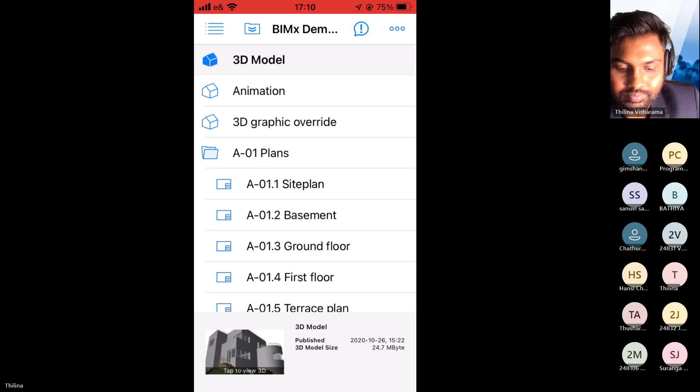I will search BIMx. Can you see my screen? Yes, I think you can. Okay, now I will click on this 3D model. Now you can see a 3D model on your screen. Then I will click on this icon. Now I can go into this building.

So if you guys are into mobile gaming, you know this. But this is entirely different from a mobile game. So this is an actual house. I think you might have heard about augmented reality. This is a sort of augmented reality. You can see a nice little piano, some pictures.

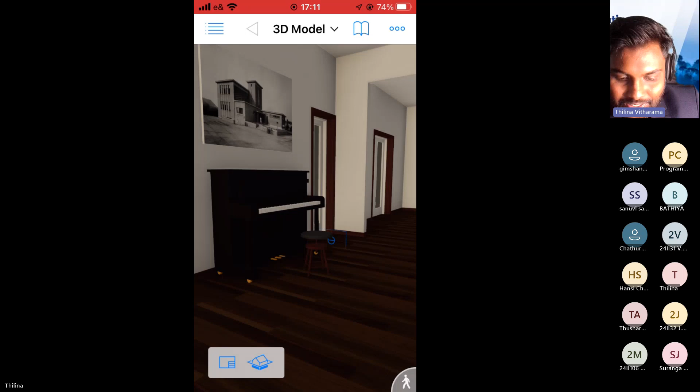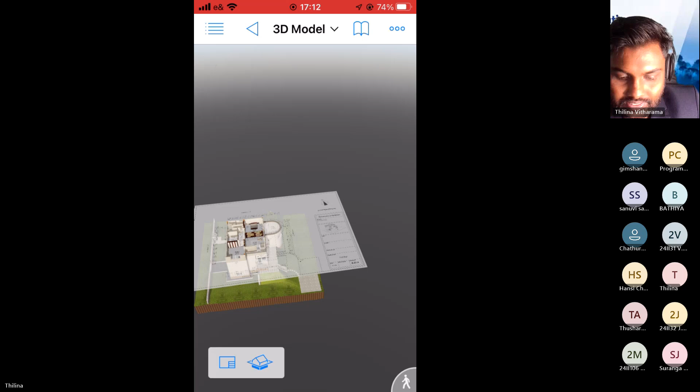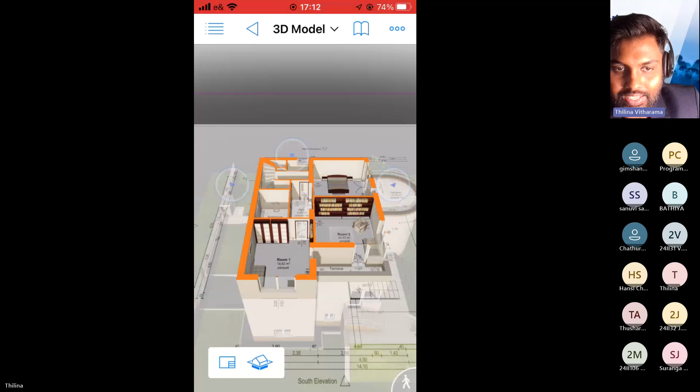I will move inside. I can go up from this staircase. Okay, this is the second level. So you can see the inside. Okay, so this is a 3D model. And if I click on this icon, I can see the 2D drawing. Okay, so this is a drawing. After starting your program, you can learn how to read a drawing. It is very simple, so you guys will have an experienced lecturer panel.

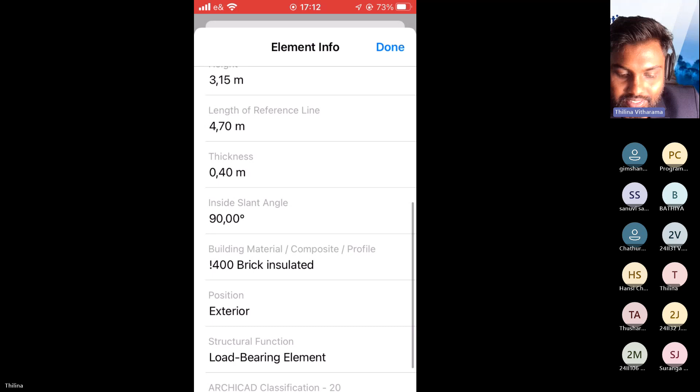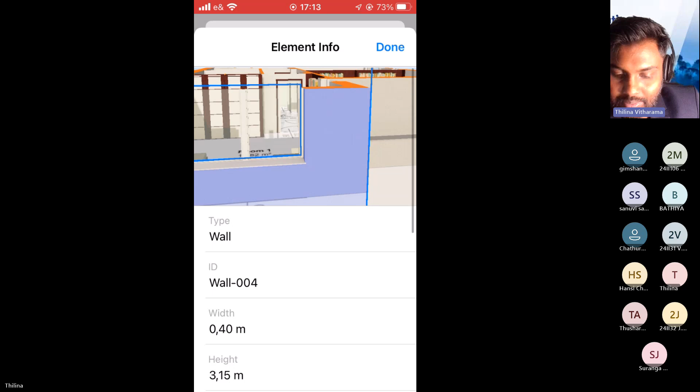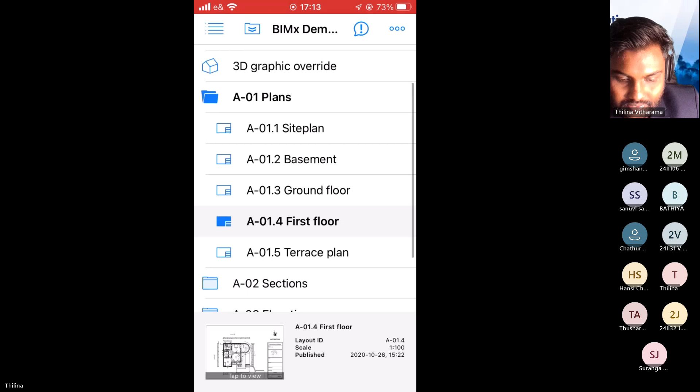I will explain a little bit about building information modeling. Building information modeling is a 3D model with information. If I click on this wall and click here, I can get all the information with regards to this wall. You can see wall type, wall ID, width, height, length, thickness, building material, position, load bearing, structural function, and classification. So you can see all the information about this particular wall. And not only the plan view, you can see side views as well. Sections—if I go to sections, I can see all the side views.

Okay, I'm observing all these things by using my mobile phone. Now I think you guys are eager to learn further on this. So we can spend these 1.5 hours as quality time. You will learn a lot of things with regards to quantity surveying and digitalization. You will love to become a quantity surveyor. I will share my screen and show you my presentation.

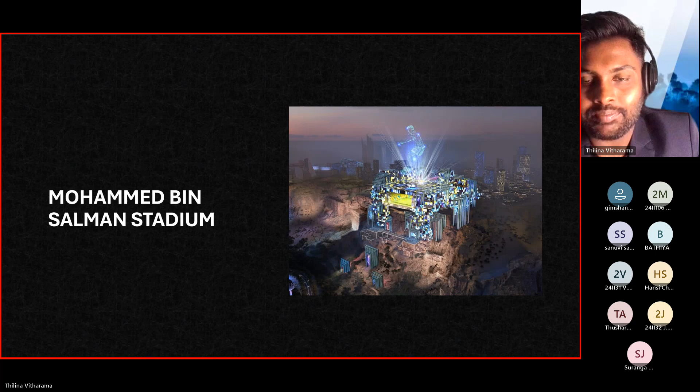Now we have to go to the future. After you become a quantity surveyor, you will work in these kind of projects. This is the Red Sea project in Saudi Arabia, the NEOM project, the Qiddiya project, and the amazing Mohammed bin Salman Stadium. After becoming a quantity surveyor, you can work in these building projects.

Okay, now you guys will be excited to become a quantity surveyor.

Before we talk about quantity surveying, let's have an idea about digital technologies, because today's topic is modern quantity surveying. I will explain about the digital technologies related to the quantity surveying profession. First, I will explain a little bit about digitalization, not from boring theories - I will explain with practical examples. Then these things will go into your blood.

I think everyone knows digital banking. If you have a Visa card, you can pay money very easily, and transfer money via your mobile phone. This is a practical application of digitalization. And socializing - we all know Facebook, Instagram, WhatsApp, Snapchat. We have a lot of digital software for socializing; socialization is already digitalized. Then the transportation industry - if you go to China or Japan, they have a lot of apps to manage transportation. Transportation industry is also fully digitalized now.

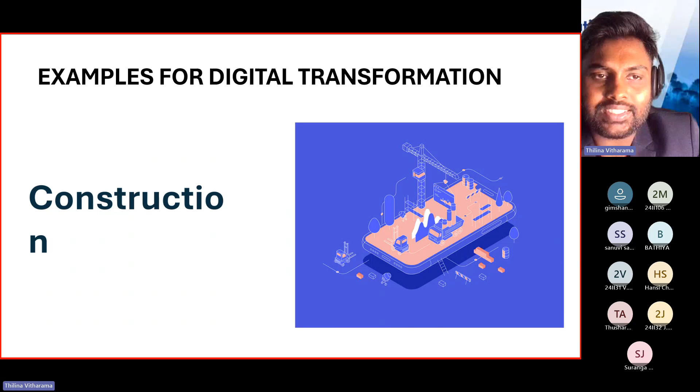Then the construction industry, our industry - what are the digital technologies available here? We have to find that out. But before that, we have to understand what is a digital building. We have a physical building and a digital building, and understanding the digital building is very important.

We design buildings in a physical scenario. Some architects get together with structural engineers and MEP engineers, and they can design a building physically. Then they can start pre-construction - they have to find a suitable person to construct that building. After that we can start construction, and after construction we can do the maintenance. So this is the physical building cycle - very simple to understand, right?

Then what is a digital building? We can create a digital replica of that physical building and manage all the things digitally. Collaborative design - we can get together on a digital platform, share our design ideas, and create a 3D model digitally. Then we can do virtual pre-construction, and e-tendering is the best example.

Then we can do virtual construction - we can simulate that 3D model and do virtual construction. After that, we can do virtual maintenance. So this digital virtual building helps the physical building process by providing information. This is a simple demonstration about physical building and digital building. I think you can understand a little bit about this.

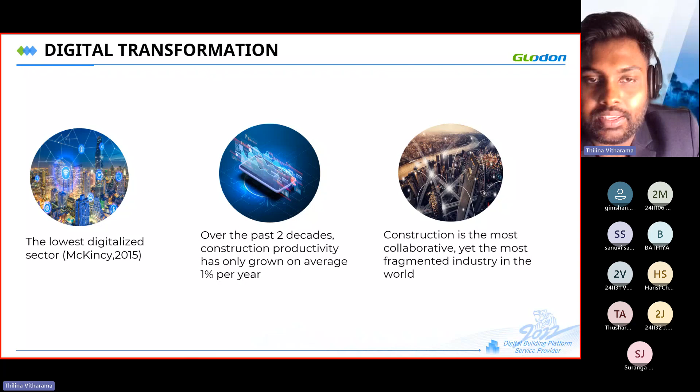Over the past 2 decades, construction productivity has grown on average only 1% per year. If we involve ourselves more in digital construction, we can help improve the productivity of the construction industry. Construction is the most collaborative yet the most fragmented industry in the world, so we have to give our contribution more and more. I hope you guys can understand these things.

Now we will look at some examples of digital technologies used in the construction industry.

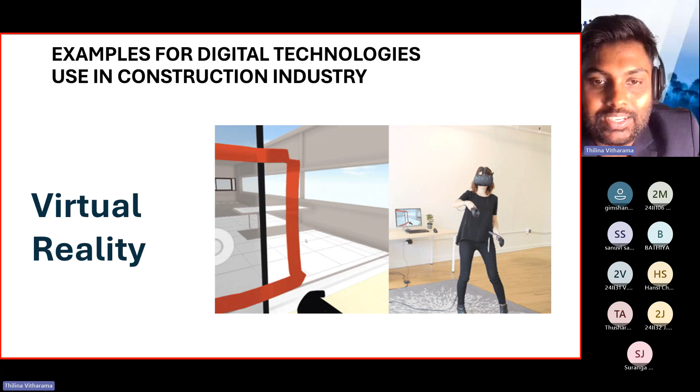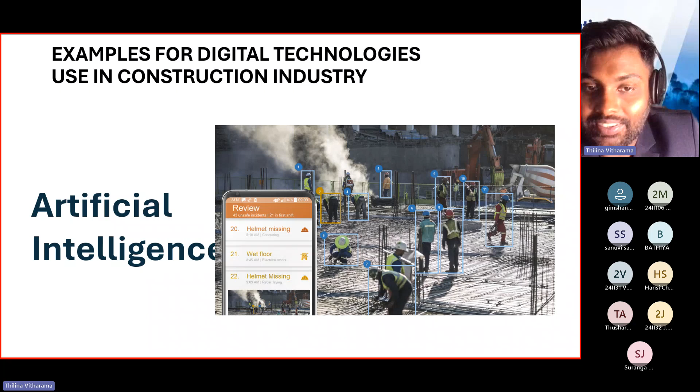Then after that, artificial intelligence. Artificial intelligence is a modern technology. We can use this artificial intelligence efficiently and effectively for construction management. For example, if you see this picture, you can see some wordings: helmet missing, wet floor, helmet missing. I will explain the practical application of this. You can run a drone on top of this construction site and take some pictures, then process those pictures through artificial intelligence. That software will identify who has helmets, who doesn't, and the wet floor areas. Amazing.

And smart wearables. Nowadays a lot of construction professionals wear these smart wearables. For example, if you wear a smart hat, that hat can monitor fatigue, prevent micro sleep, detect collisions. This is very important for health and safety management.

Then 3D printing. Recently I saw a video on LinkedIn. Now Dubai is going to do some 3D printed buildings. This technology is already used in USA and China. This is amazing technology. You can construct buildings within 1 week by using this 3D printing.

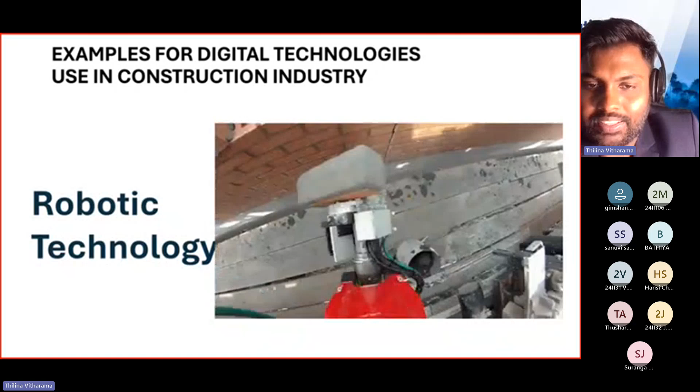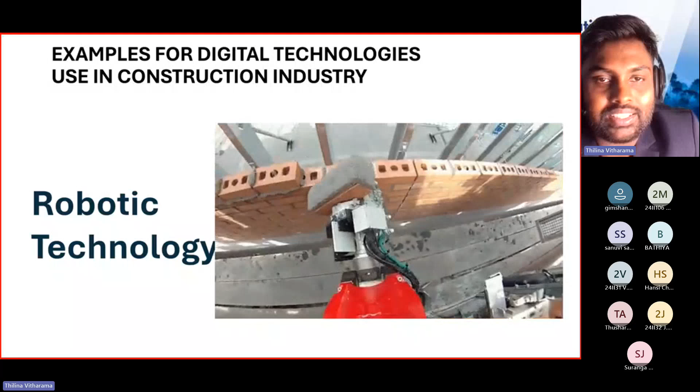Then robotic technology. There are plenty of robotic technologies in the construction industry. We have bricklaying robots, we have tile laying robots. This is another modern technology used in the construction industry.

And drone technology. This is amazing technology. In Sri Lanka, we mostly use drones for wedding photography, right? Wedding photography and traveling. But we can use these drones for the construction industry. We can monitor construction progress by using drones. But in Sri Lanka, we use them mostly for wedding photography.

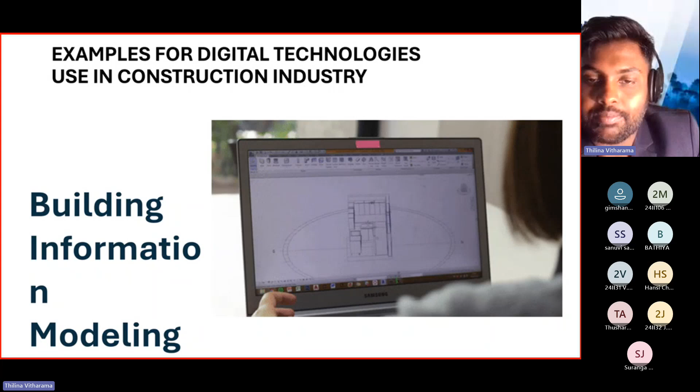Okay, so the last technology, building information modeling. I'm into building information modeling. We can create a 3D model by using software like ArchiCAD and Revit, and we can manage all the information of that 3D model. After getting that information, we can use it for construction management. This is very interesting.

Now we can come to our main topic: quantity takeoff. As a young quantity surveyor, you have to start your career and your learning from this quantity takeoff part. First I will explain to you about this manual takeoff.

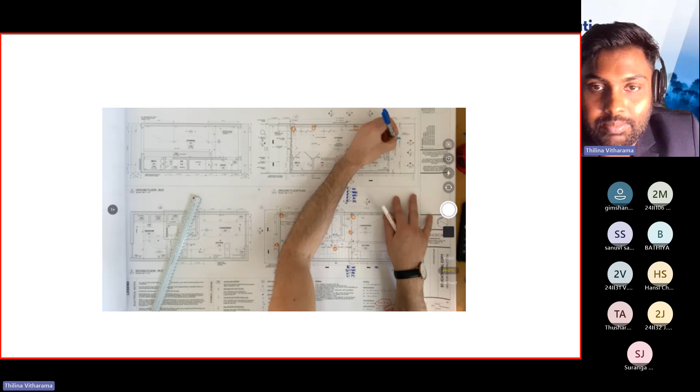20 to 30 years back, all quantity surveyors took off quantities by using this manual takeoff method. We had large scale drawings, so we used manual scales and extracted all the quantities, then did our estimations. Then after that, 2D takeoff came.

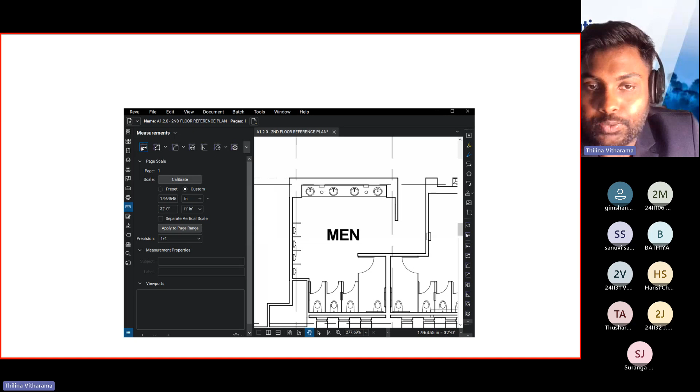We had a lot of software. First we adapted to AutoCAD plus Excel. We extract all the quantities by using AutoCAD, then put all the numbers in Excel and manage our cost by using that method. After that, software like Bluebeam and PlanSwift came, and we used those to measure quantities.

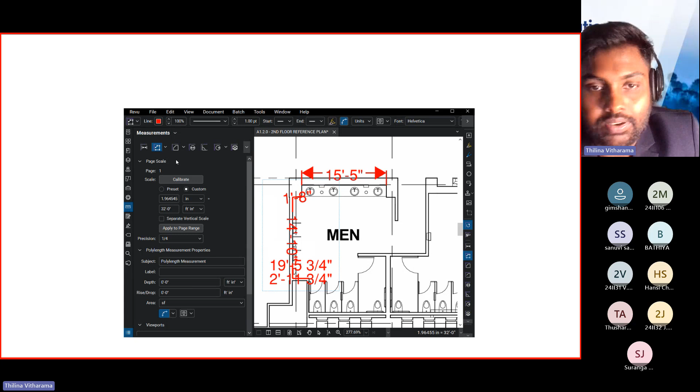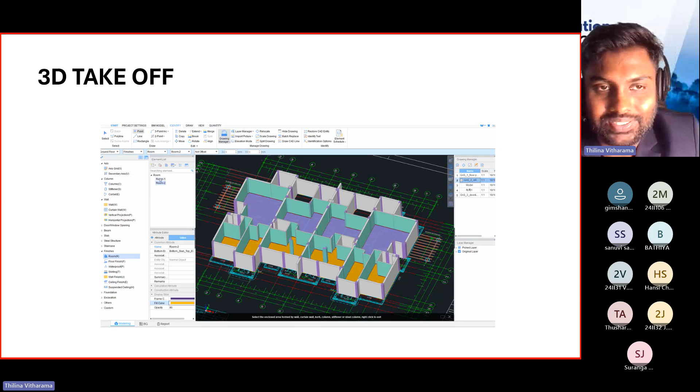Then after that, CostX came, and we used CostX for our measurements. Now this is the 3D takeoff era, the BIM era. Nowadays quantity surveyors are receiving 3D models instead of 2D drawings, and we have to use these 3D models for quantity takeoff. I think now you have got a very good understanding about this quantification.

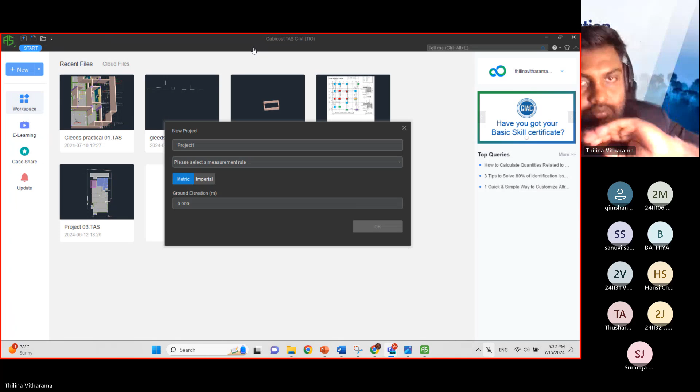Now I'm going to import a 3D model for this building using this software. Extremely sorry for the inconvenience.

You can see, please select the measurement rule. I will explain a little bit about what this measurement rule is. When we quantify a building, we have to follow some rules. As an example, when we measure a column, we don't know what height we have to choose, so therefore we have to have some rules. You will learn about these measurement rules in the future.

Have a small idea for now. The amazing thing about this software is that it is embedded with the measurement rule. There are several measurement rules available in the world. I will go with NRM2, which is the UK New Rules of Measurement. In Sri Lanka we have SLS 573. I will click on this NRM2 and click OK.

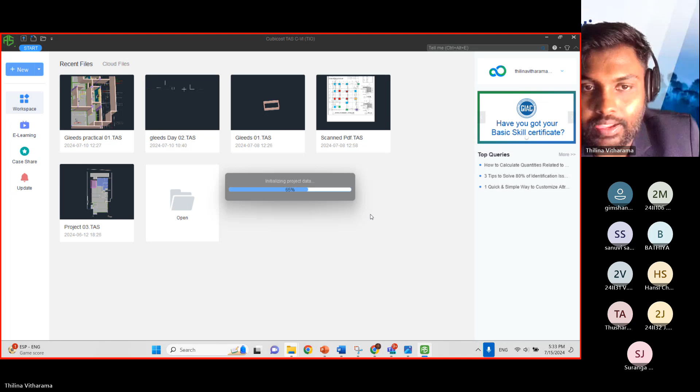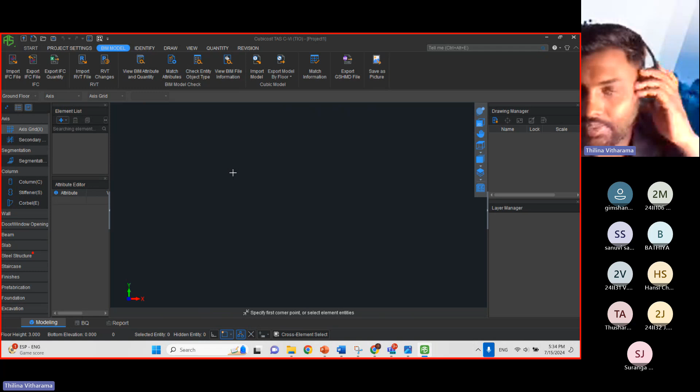Now you can see this software interface. I can import a BIM model to this software. I think now you have a small idea about a BIM model - it is like a 3D model. I think on television or internet you have seen some 3D models. Nowadays, before we construct a house, we get a 3D model of that particular house, then we can have better visualization of that house. Now I'm going to import that 3D model to this software. You can see this is the BIM model.

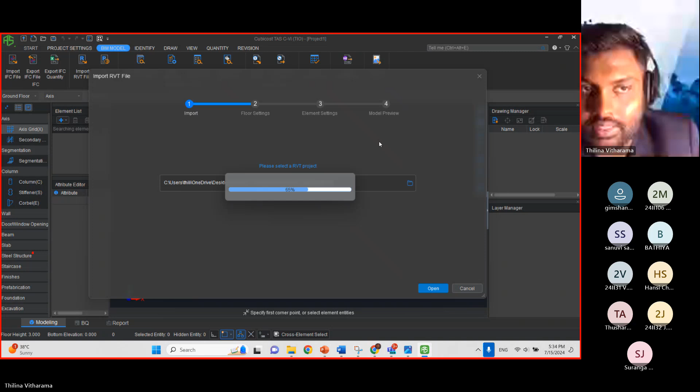I will click on import Revit file and click on this folder icon, then select this one and click open. Then the information will slowly come into the software. I will click next and next. Now you can see the 3D model.

This is modern quantity surveying. Now I will click OK and click all close. So this is a 3D model. You will learn all these things during your course, and I think you guys have some idea about these things now.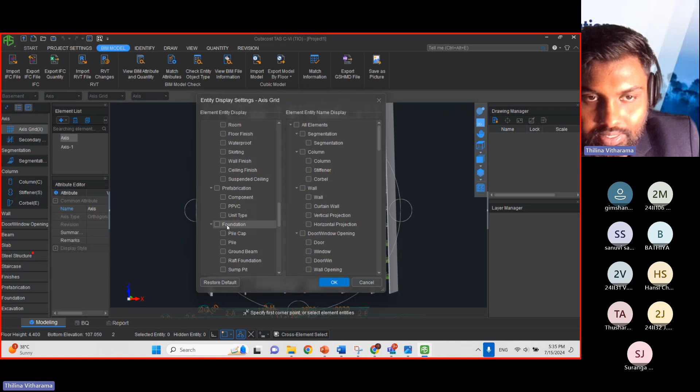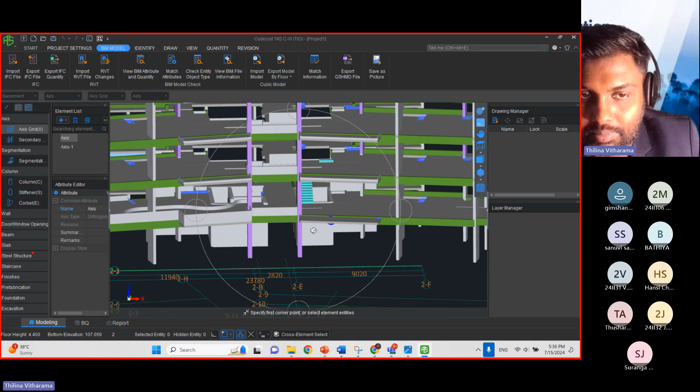So this is a high-rise building. This high-rise building has a lot of building elements, as you can see, walls, columns and slabs. You can see a lot of building elements in this high-rise building. Amazing, isn't it?

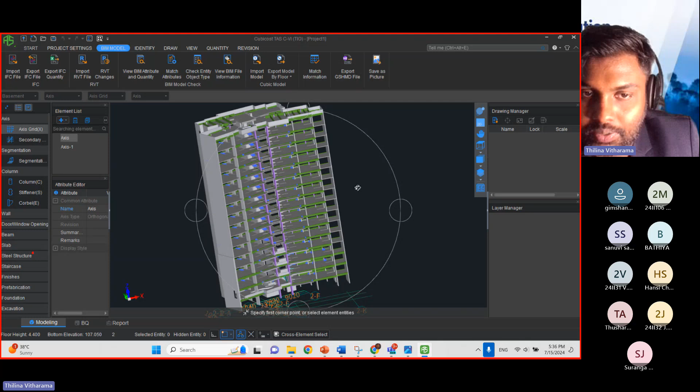Now, as quantity surveyors, what is our responsibility? As young quantity surveyors, you have to focus more on quantification. We are the responsible people for the cost. Before we calculate cost, we have to calculate the number of elements, right? How many columns, how many beams, what is the quantity of these slabs. We have to calculate those things.

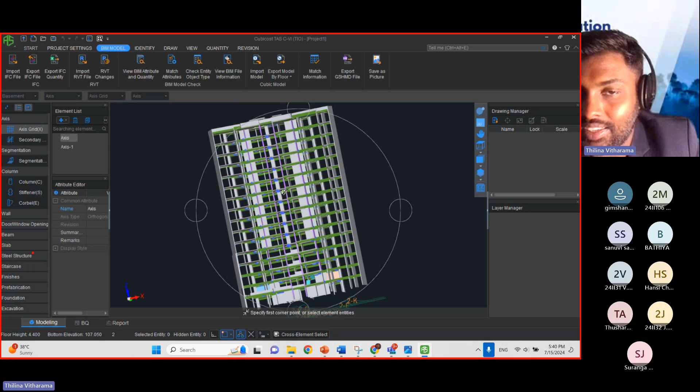Quantity surveying is not only about measuring quantities. Sometimes you can become an arbitrator or adjudicator, so if you're interested in law you can choose that path. If you're interested in commercial management or management, you can choose that path. If you're interested in technology like building information modeling, software and coding, you can become a building information modeling quantity surveyor, BIM quantity surveyor, 5D BIM quantity surveyor. So this is a versatile profession.

So the thing is, you have to focus and work hard. After becoming a quantity surveyor, it will be really easy for you to build a future out of it.

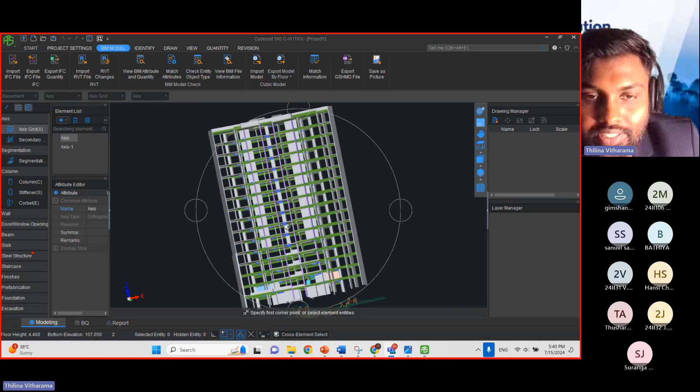Sorry for the inconvenience. Now we have come to this level. Now I'm going to quantify this building. If you use this software, it will be really easy to quantify. I just need to click on a few buttons, click on quantity and click on calculate.

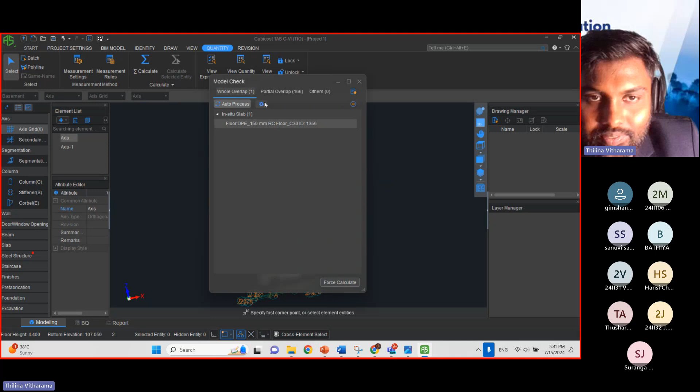And the funny part of the software is that if the designer has made some mistakes, you can detect them. But you will learn all those things in future, so Suranga knows about these things, clash detection and all. I will not explain these things now, I will simply quantify the building.

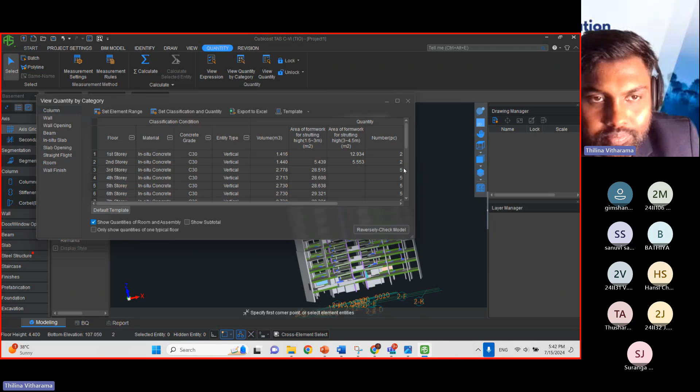So you can automatically quantify this building. Now you can generate quantities very easily. Now you can see... don't focus on all the things.

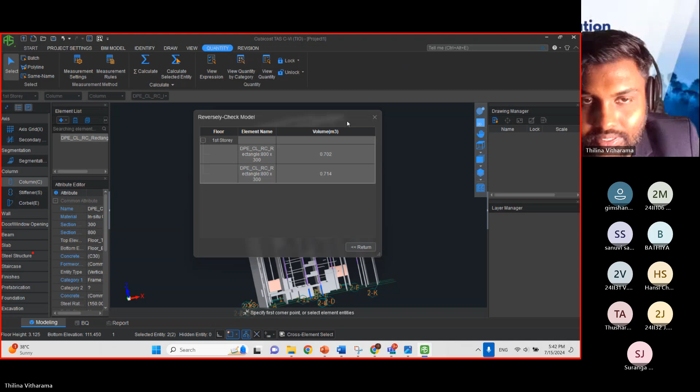Okay, understand this in a very simple manner. You can see the first story. The column volume is 1.416. This is the first floor, and in this first floor I have a few columns, so the column quantity is this. If I go to second story, these are the columns and you can see the quantity.

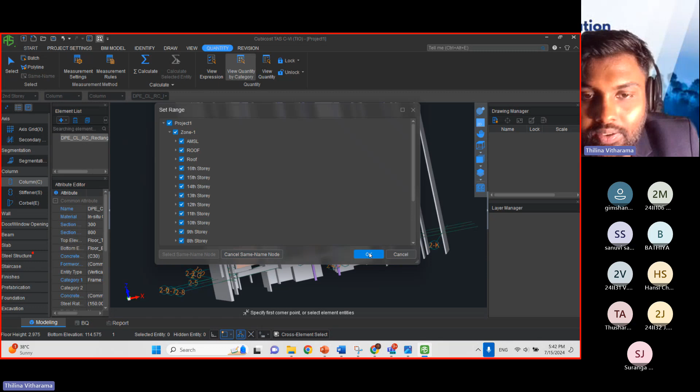So from this software you can generate quantities automatically. This is amazing, isn't it? If you have any questions, please feel free to ask. This is getting exciting, right?

So, a lot of companies have developed a lot of software to make our work easy.

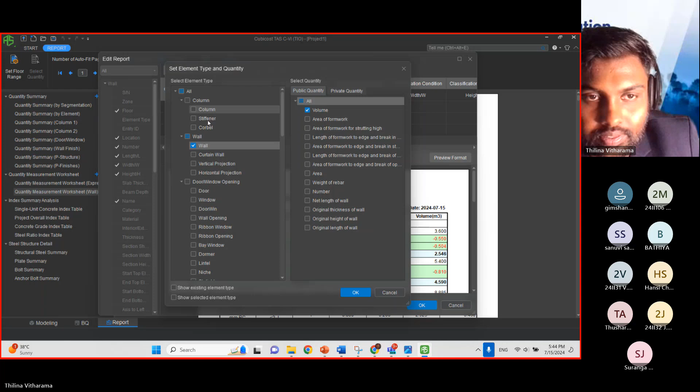So if I go to column, you can see this is column volume, and you can see numbers. This is the length, this is the width, this is the height, and this is the volume. So like that we can have a quantity breakdown automatically from this software.

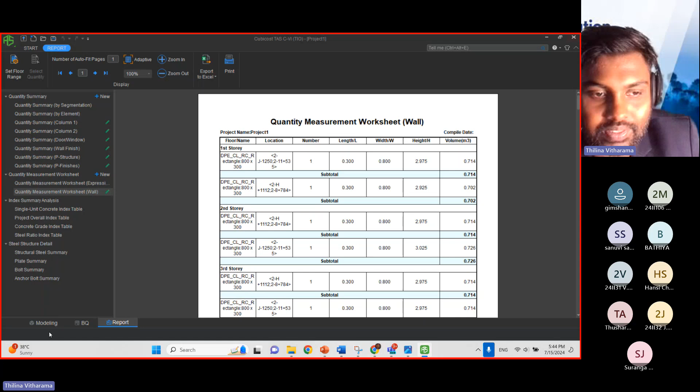If I further explain it, it's like this. This is a column. You can see this is a column, and this is the length of the column, this is the width of the column, and this is the height of the column. Simple mathematics - width, length, height, you can get the volume. So these quantities will come automatically from this software.

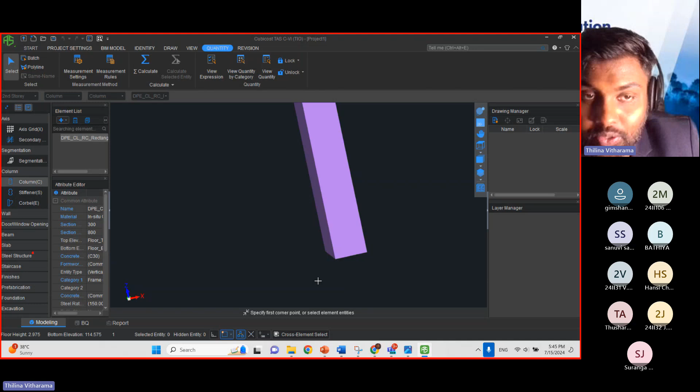So after becoming a 5D BIM quantity surveyor, you can easily extract quantities and prepare cost reports. This is a brilliant profession, so you can use these technologies at their fullest extent.

After becoming a quantity surveyor, you will use this modern technology and you will work in the modern world. Now I think you have got a very good understanding about 3D measurement. I think you are very new to this profession, so this is a heavy load for you.

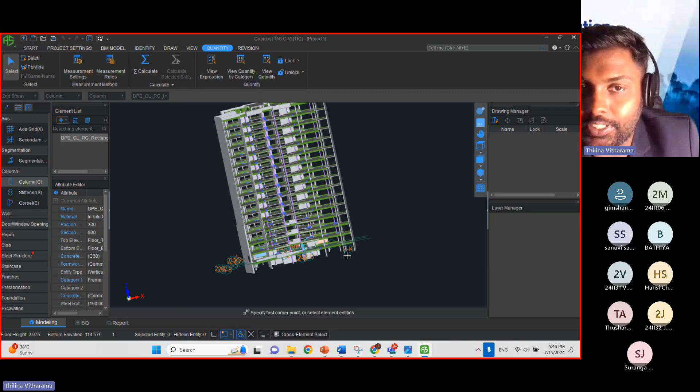But you have to have a basic understanding about these things. So then you know, after completing HND, I can become a 5D quantity surveyor. I can pursue a career in building information modeling. I can work with technology rather than doing an office job.

Now if you have any questions, please feel free to ask.

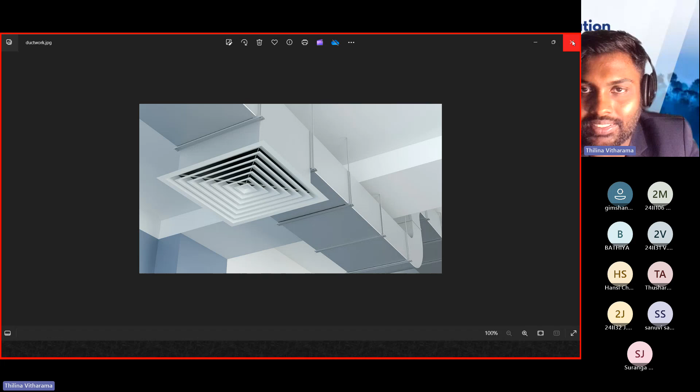Can you say what is this? This is an air duct. Have you seen this kind of thing in a building? Sanuvi, you have seen it, right? This is like an air duct, and this is a rectangular shape thing. If I draw this one using Excel software, you can have a better understanding. Now please observe - we have to measure these kind of things after becoming a quantity surveyor, right?

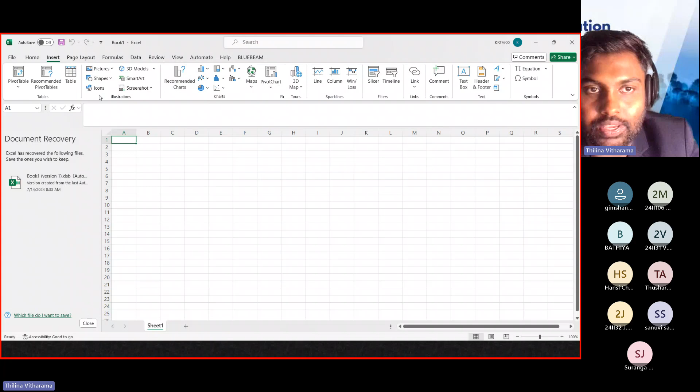Now I will show you a strategy - this is amazing. I will share my screen and draw something. I think you are from a mathematical background, and you have done maths for O levels, so you will understand this easily.

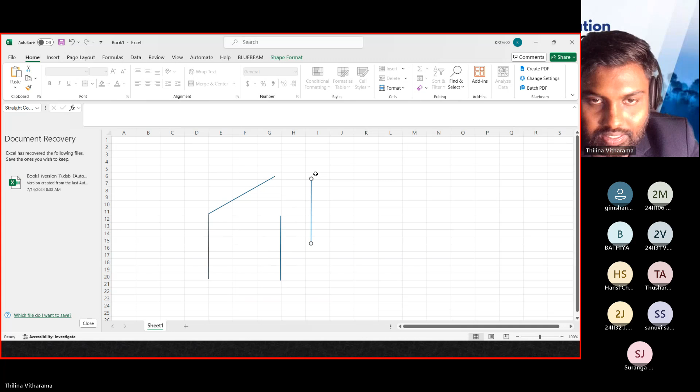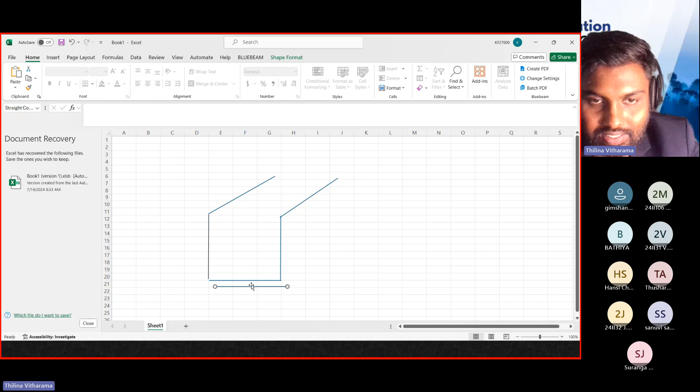Now you can see these basic maths. Now I'm going to draw that air duct. This is my air duct. It's simple, right? You can understand this. This is the air duct, and I will change this one - this is simple maths.

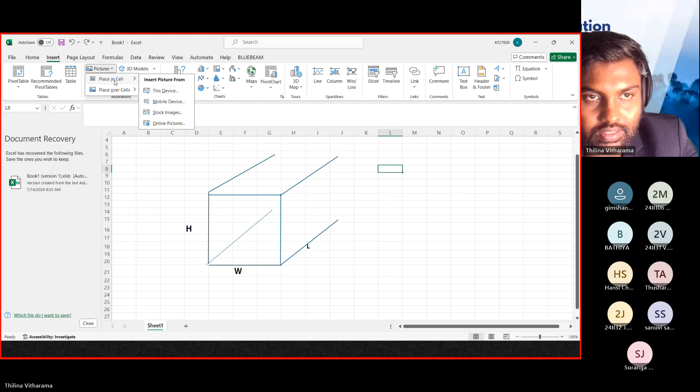I have drawn this. I want to calculate the external area of this duct.

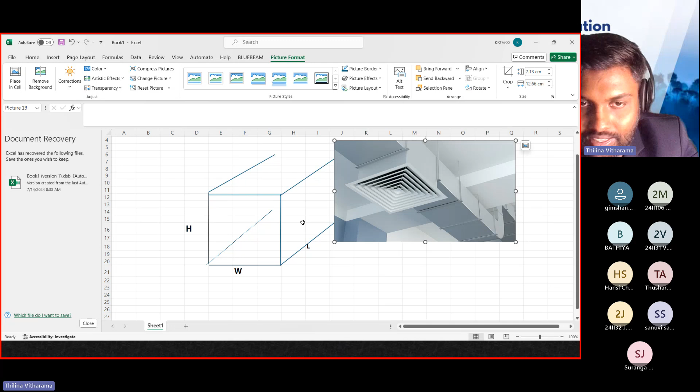So what is the formula? We have to multiply this sectional length with this length, right? We have to multiply the perimeter of the section with the length of the duct - that way we can get the wrap-around area, right? I want to get the area around this duct. So if you understand this, please say yes, Sanuvi.

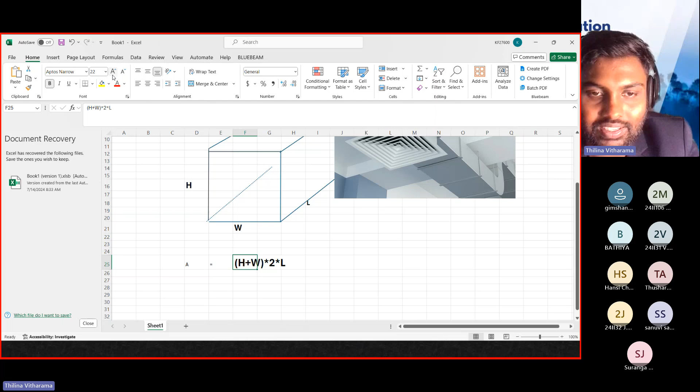You can understand, right? Yeah, simple, right? Okay, the equation will be H plus W, into 2, multiply with L, right? So you can understand this simple formula, right? All right, and others? Yes, you can understand, right? Okay, yeah, now this is the formula.

Now we have amazing software. This is called PlanSwift software. It's not a 3D measurement software, so we can measure things from this 2D drawing. I will go and get the new drawing. See.

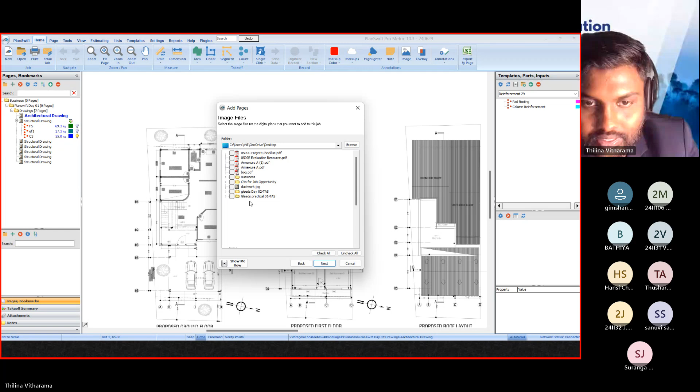Okay, now you can see, right? This is a drawing, an AC drawing. And this is a plan view of this duct.

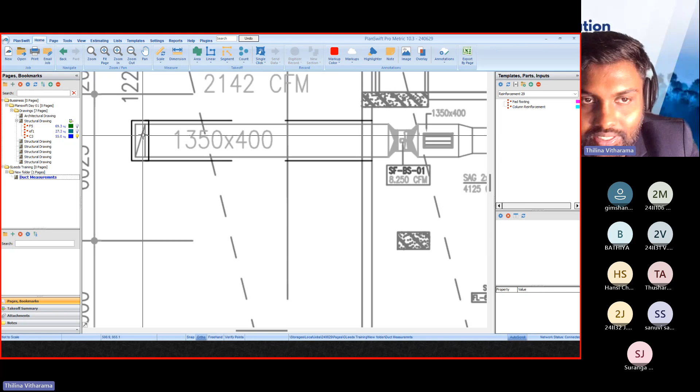Height 400, width 1350. Okay, we have to get the quantity.

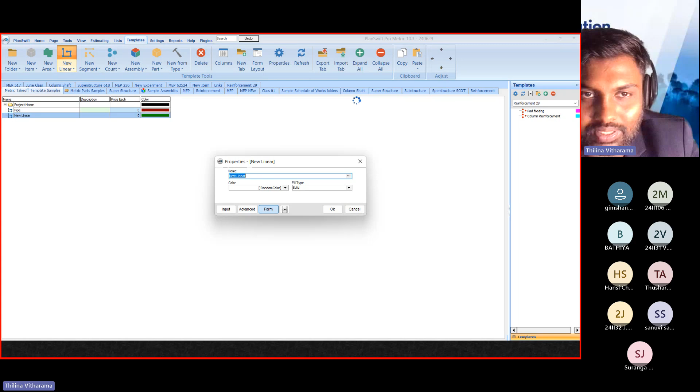Now I will show you the method. I'll go to this and click on this linear. Now this is amazing. Don't worry about these procedures, I'll quickly do this. These things are not important.

Now I will show you. Please have a brief understanding about the process. Don't think about these procedures, you will learn all these things in future.

Now guys, this is quantity survey. Do you believe this? This is not software engineering, this is quantity surveying. But the amazing thing is we can create our own measurement. We can think and do something in here.

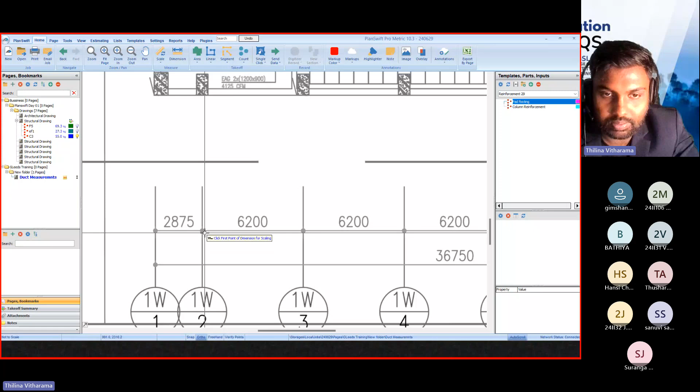Now, from the software, you can measure quantities using this area. So if you click on this area, you can just measure. I will show you. Don't think about these things, I will quickly do these procedures. Think about the big picture. The scaling, these things you will learn in future. But understanding the big picture, I'm going to teach you.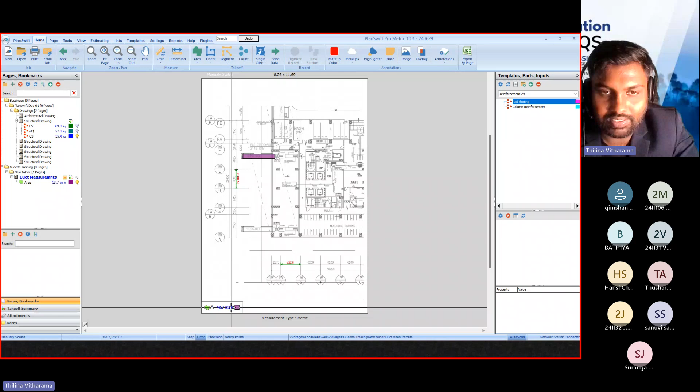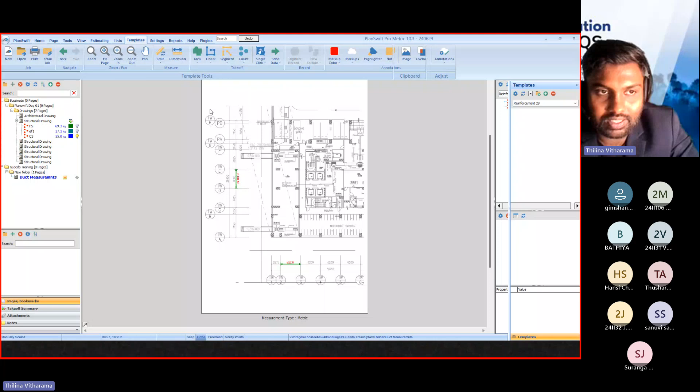Okay, now observe, this is the magic. So we can code our quantity. So this is like software engineering, so you have a coding system.

If you click here, you can give width. I can give width. Then if you click here, you can give height. And give height.

Then you can create a formula. What is the formula? Length. I will show you this one, then you will understand better. What is the formula? This is the formula, right?

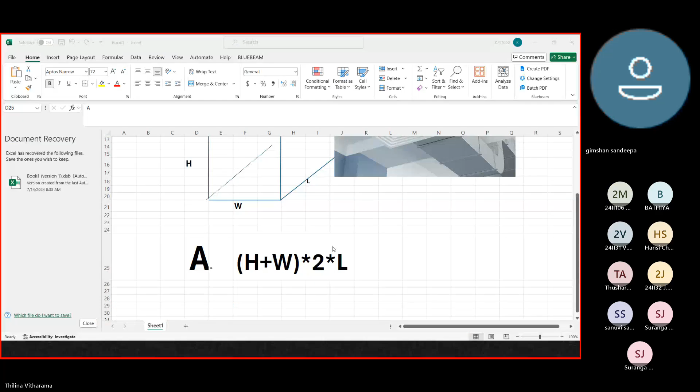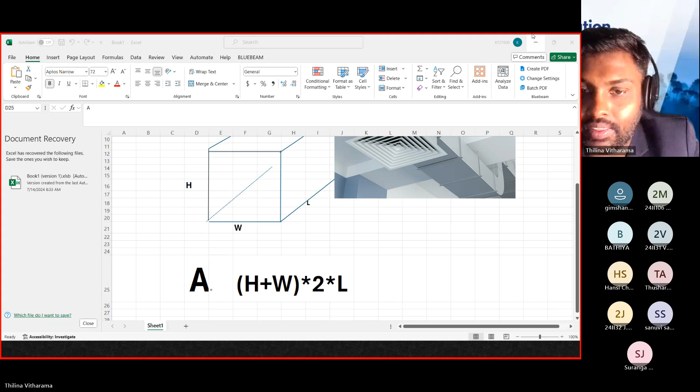We have to create the formula like this: h plus w, multiplication sign into 2, and we have to multiply it with length. So we can put this formula in our PlanSwift software. This is very simple. And takeoff means length. So we can put h plus w. See, we have width plus we have height.

You might not understand any of this, but please understand the big picture. So you can code your own measurement, it's like a coding software. Quantity surveying is an amazing profession, you have to think sometimes. Even at the beginning you can think and do new things, so that is very important.

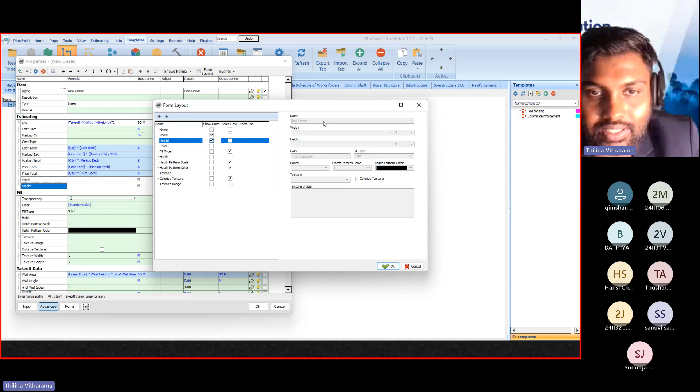So I have created this measurement element by myself. I can give unit, like this. See, this is my creation, with height. This is my creation, I can create this by my own. After that I'll click, okay.

Now I can go to my drawing, then I can measure this one. I can go to MEP and click on this one, and I can rename this one as 1350 into 400, and I can give width. I have created this one. Width 1.350, height 0.4.

Then I can measure like this. See, this is the quantity.

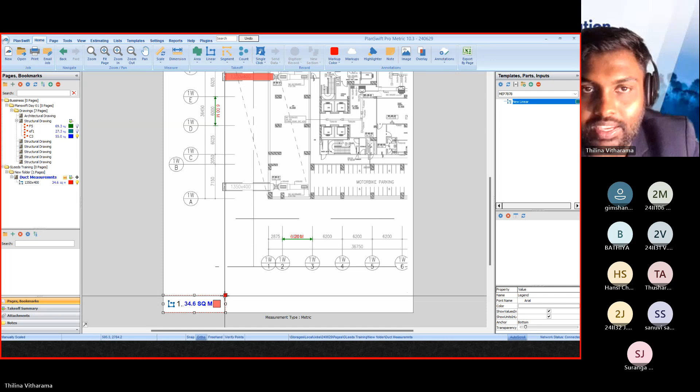We can generate our own templates and measure. There is room to think in this profession. I want you to understand that. You might feel this is a complex process, but after becoming a quantity surveyor, you will become very good at this.

Now we can come to the final part of this session: why learning digitalization is important for quantity surveyors. We prepare for future challenges. As quantity surveyors, we have to be prepared for future challenges. This is a moving world, and there are a lot of comments regarding the economy of the country. So we have to think positive, think about our future, and think about all the opportunities we have.

As a quantity surveyor, if you want to pursue a brilliant career, you have to merge with digitalization and go abroad for the profession. Due to the financial crisis, a lot of people tend to go abroad. Many quantity surveyors migrated to UAE, Saudi, Australia, New Zealand, Canada. If you want to migrate to a new country, you need a very good theoretical background regarding quantity surveying, and a very good understanding of digital technologies. Without digital technologies, it will not be possible.

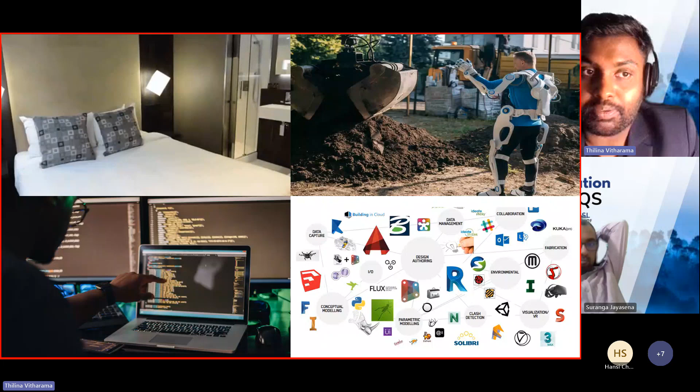And as I mentioned earlier, if you want to become a proper quantity surveyor, think out of the box, and you can focus on mindfulness as well. Practice mindfulness, think out of the box, then you can become a great quantity surveyor. And engage with new technology, not only quantity surveying software, not only 3D modeling software, but also you have to learn about coding in order to become a proper and talented quantity surveyor.

This is extra talent you can develop. If you have 3D modeling skills, and if you have graphic designing skills, you have platforms like Fiverr, Upwork, Freelancer to earn money. This is also important as a quantity surveyor.

So with that, I would like to conclude my session. I think you have got a lot of insights from my session. So shall we give them 2 minutes to ask any question?

Yes, thanks a lot, Thilina, for that interesting session. So the students, I think, don't have many questions, because you explained most of the things in a very detailed and simple manner. So that's maybe one of the reasons there are not many questions coming from them.